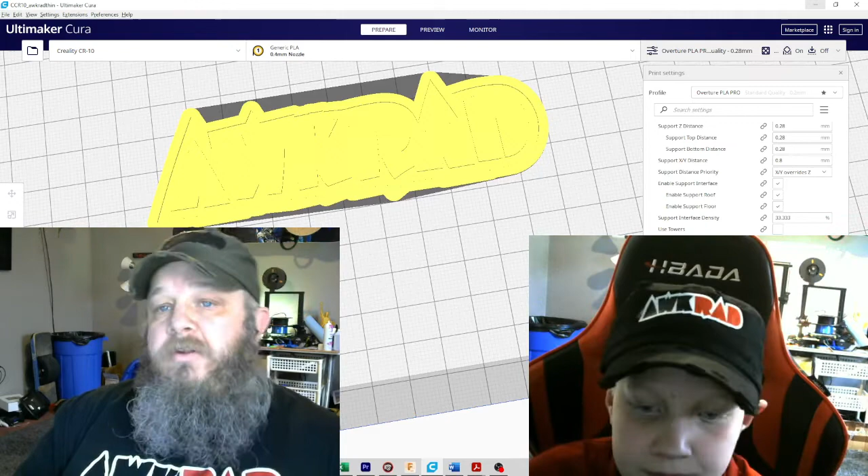Slicers? What are you talking about? A slicer. You want to know why they call it a slicer? Because they're taking your 3D object and putting it into a whole bunch of different layers, called slicing. And that's part of what this software does. The other part is you can determine things like how fast it prints, how hot the melting end gets, whether what you're going to print is solid or hollow, or partially solid or hollow. Did I miss anything? It does all those things.

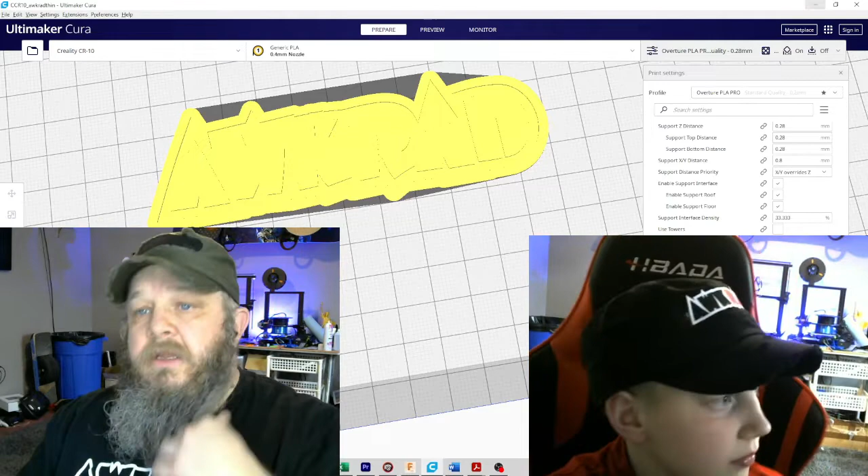Did you say if you make it larger or smaller? Oh, yeah, you can make it larger, smaller, the scale can be adjusted. Also, the quality, right? You can adjust the layer height. So each layer that gets printed can be really, really tiny, which would give you finer detail, or it can be a little thicker, which would print faster, but it wouldn't look as good. So that's kind of what this software does.

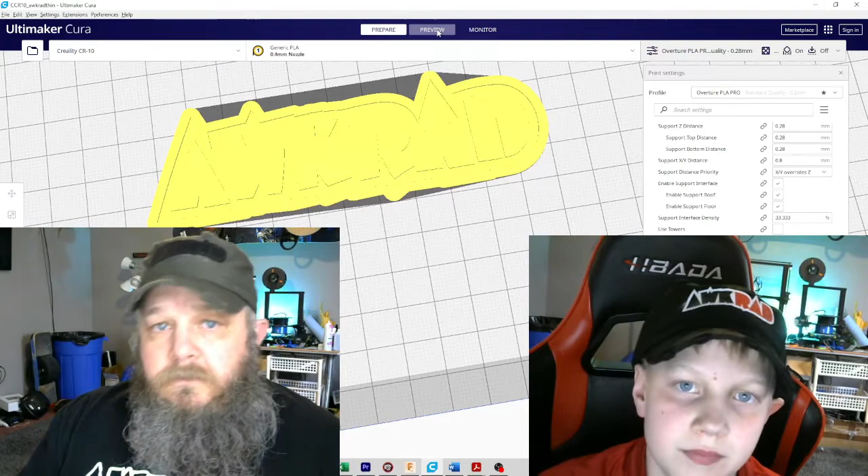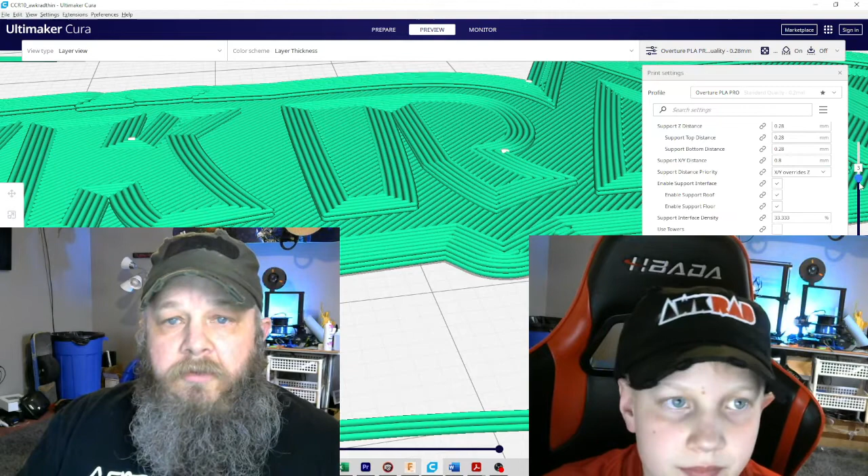I'll put this in a mode where you can actually see some of these layers. I don't want to overcomplicate things, but basically if you zoom right in here, you can see 1, 2, 3, 4, 5, 6, 7, 8, 10 layers, something like that. And you can set that to whatever you want. And then you can go down through and see what's going to happen. The first layer is going to look like this, your second layer like this, and your third layer like this. So it's really only a few layers to create this file, and that's going to instruct your printer on what to do.

Now, the slicers are also free.

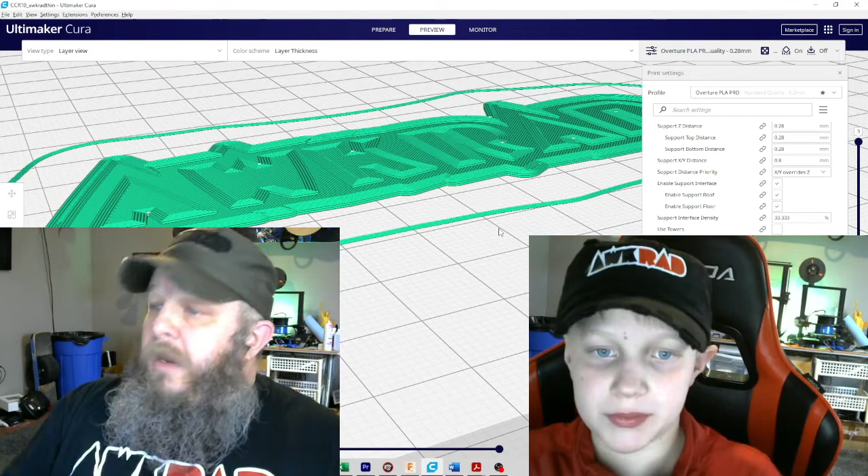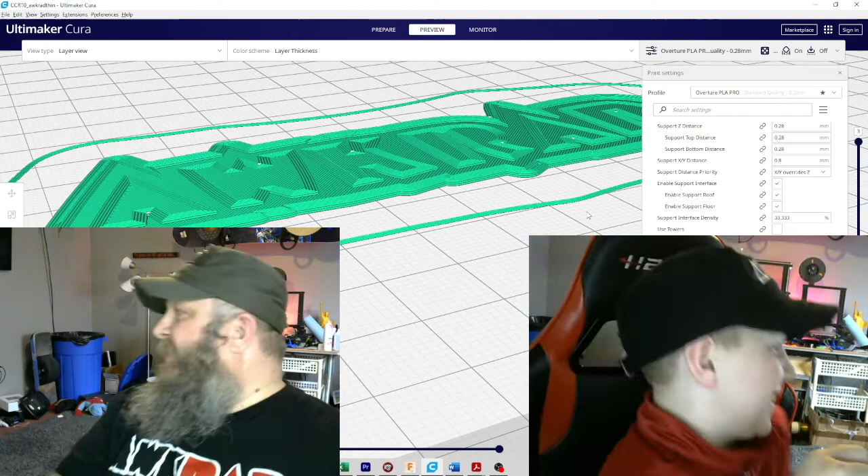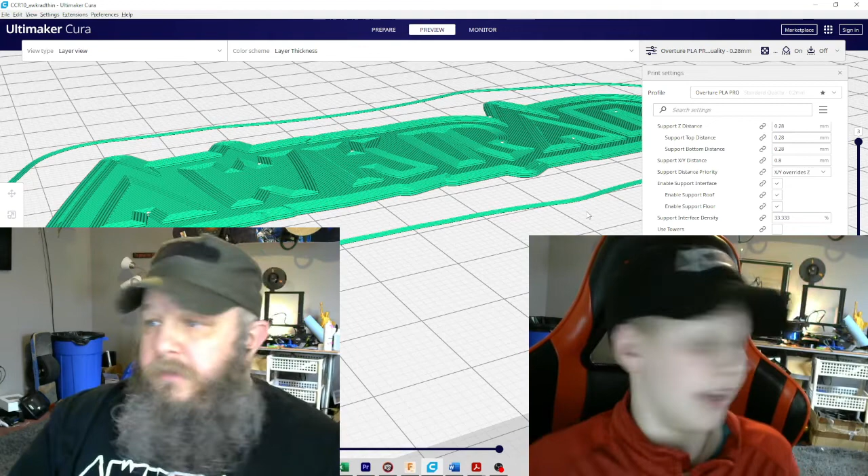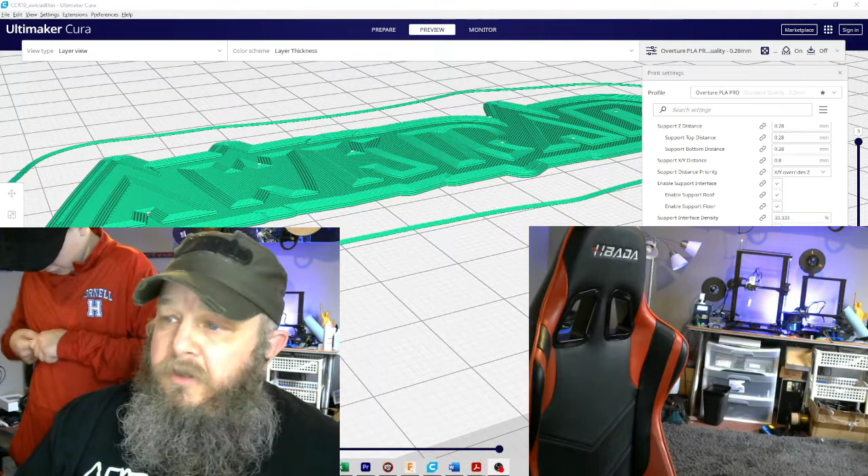Yeah. All right, so it's saved to disk, and that's what we did. And then you save it to a disk, or you save it to your C drive. And in the case of my printer, and this is where we get into the next video, guys. I'm not going to get there with this video. The next video is some of the options for printers and what kinds of things you might not be able to live without and what things you can.

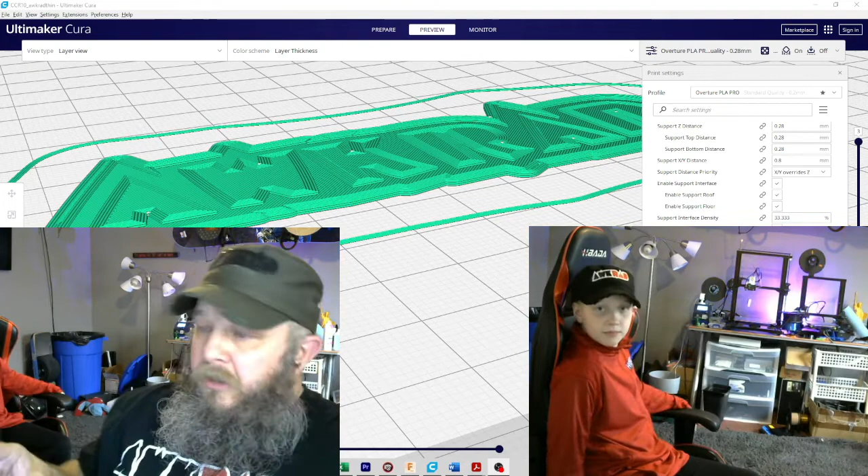In this case, the difference between his and mine as it relates to getting the file to the printer is mine has what's called OctoPi, which is a Raspberry Pi based computer that has a web interface, and so I can upload directly from my computer to the web interface. And I'm gonna show you that right now, just so you can see it. I'm kind of giving a longer view of what our thing looks like. And that's what OctoPrint looks like. It's basically just an IP address in a web browser on our network.

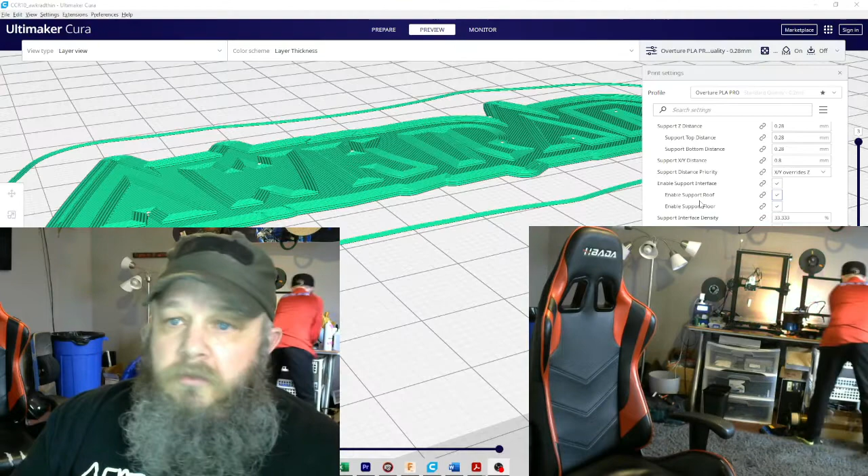I've uploaded this file right here to the machine. It controls everything, the temperature, can move it, whatever. I'm going to go ahead and hit print, and within a couple of minutes, this thing will start printing, and I'll bring the phone over and show you what it's doing. So, quick recap. Get your design file, get it into a slicer and slice it, send it to the printer somehow, and then the printer does what it's supposed to do.

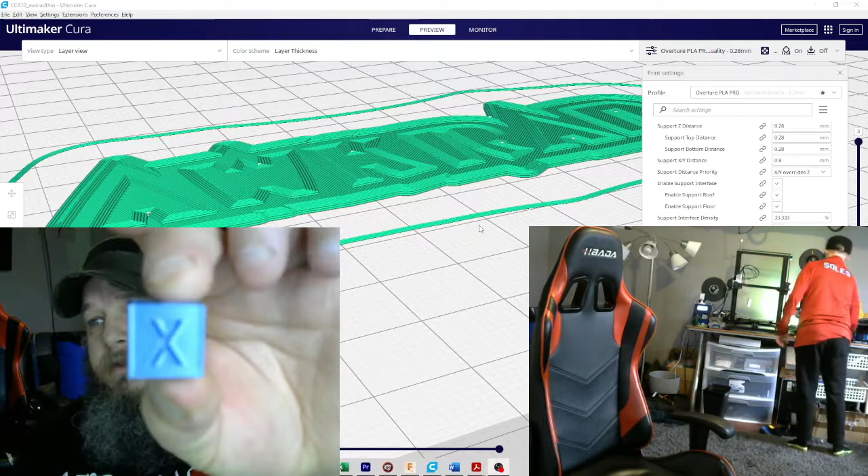There's your X, Y, and Z. Yeah, so X, Y, Z. That's smart, yeah. So that's your X, left and right, your Y, to and fro, and your Z. Oh, look at that, guys. Is actually kind of up and down. Mine a little bit, but whoa. You can kind of see that it's coming down. Which one? Mine or yours? Printer. Oh yeah, yep. Kind of tell it's going down. Let's just do it this way.

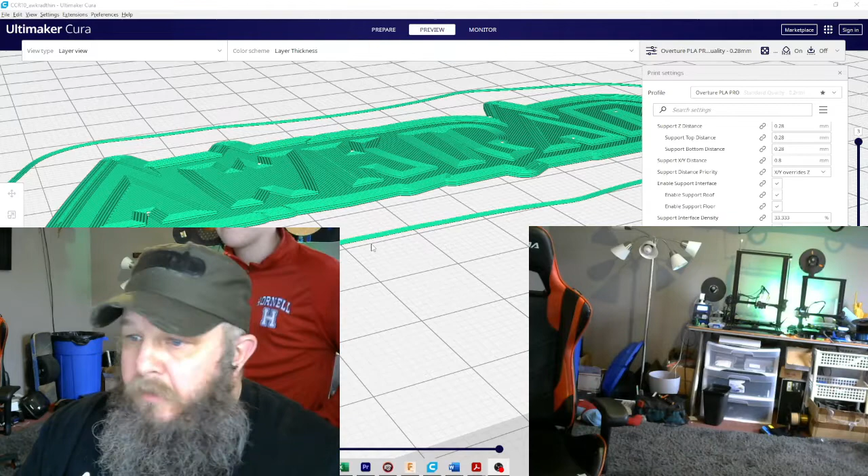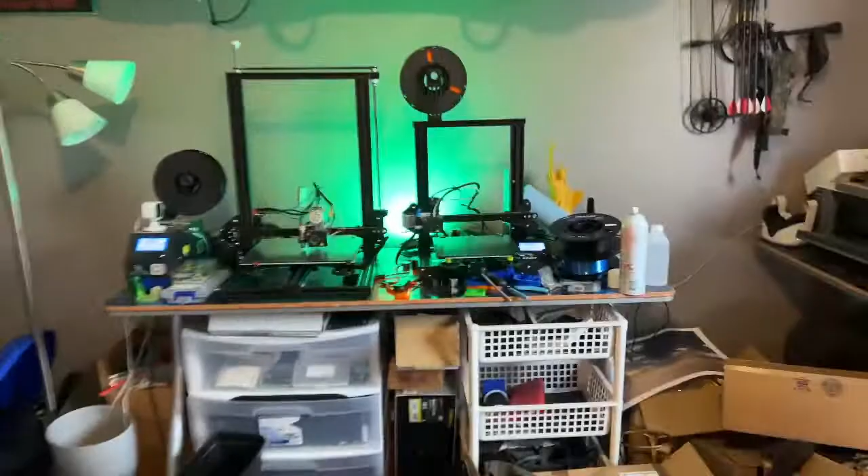Let me go to this screen, this guy. Bing. Yes. Whoa. Oh, look, we're mobile. We're mobile.

Okay. So we started that print. Let's start mine. And right now, what it's doing is, this has an automatic bed leveler on it. So it's sensing different points on the bed to determine if the bed is perfectly level or not. And if it's not, it's going to go ahead and adjust the print to accommodate for any out of level on the bed.

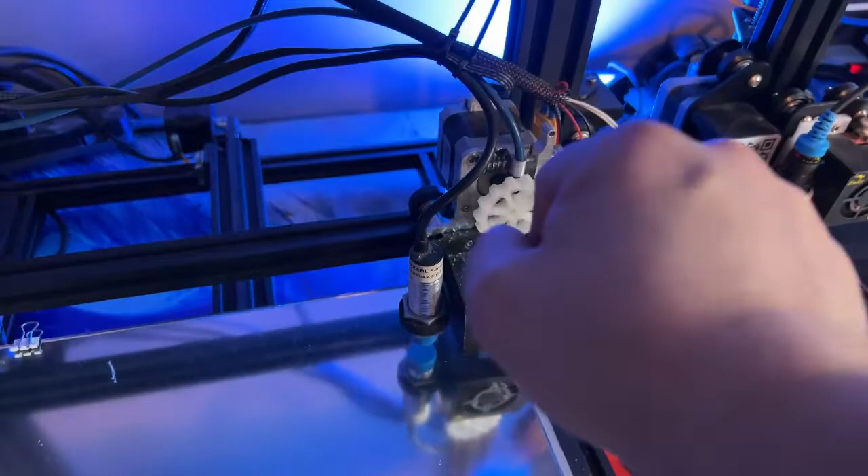Like I said, we're going in the X axis now. And then when this bed moves back and forth, that's your Y, and then up and down is your Z, and this is your extruder or your hot end, and that's called your E axis. Okay, so now it's going to go ahead and bring itself to the beginning. It's going to print a quick little sample line. See if I can get down here and show you that.

Can I hear your audio through camera? You should be able to hear it through my phone. Oh yeah, that's on your phone. Hopefully.

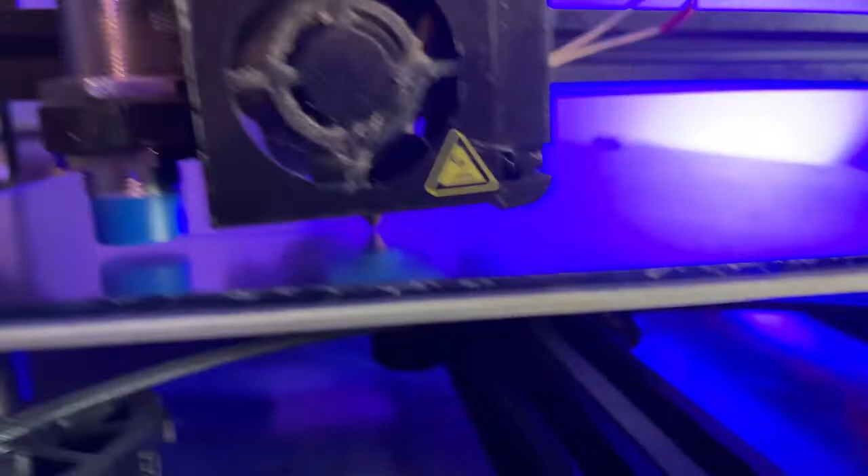And there we go. It did print a nice sample line. It's looking pretty decent. There we go. Now I've got it set to a skirt. So what it's doing at this point is it's going around and putting a line here around. It's not the actual print, but that line I can feel, and I can adjust, and I can tell whether it's actually sticking to the bed or not.

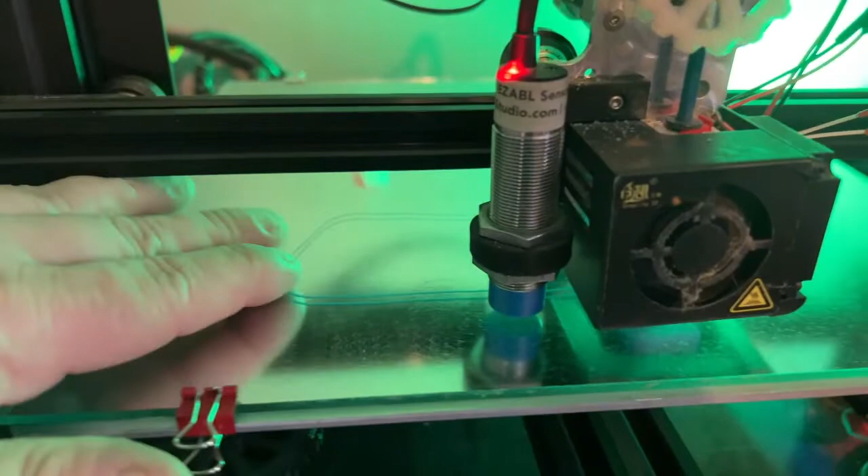And then there's some fine-tune settings you can do to make sure that if I've got to go up or down just a tiny bit to squish this into the glass to make sure it sticks. That's pretty much what's going to happen here. So it's going to do the first layer, the second layer, the third layer, and when it's all done, we're going to have a printed logo, just like what you saw on the screen. Pretty cool, huh? Yeah. Cool.

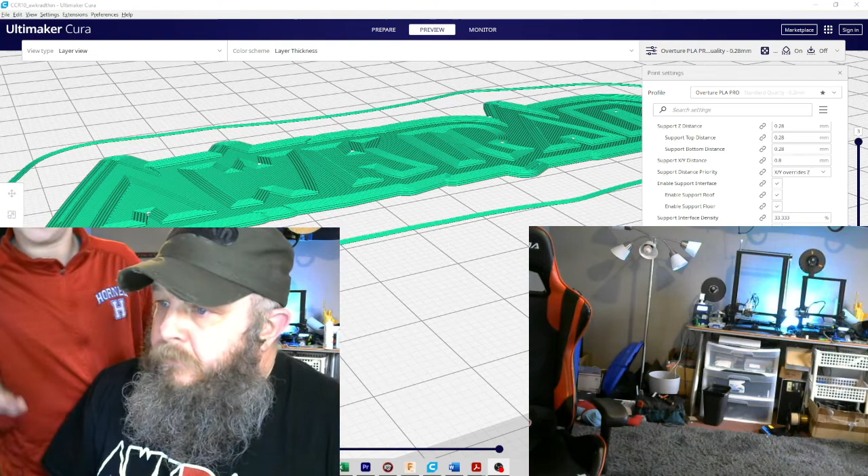Let's go back. Wait, I have a question. What's up? So I can hook it up to my computer. What if you don't have it connected to your PC so you can start it? What if you need to use this? Oh, we can show them real quick. Do you know how to do it? I can't connect it to the PC. Oh, well, we'll have to show them that in another video. But yeah, that's basically it.

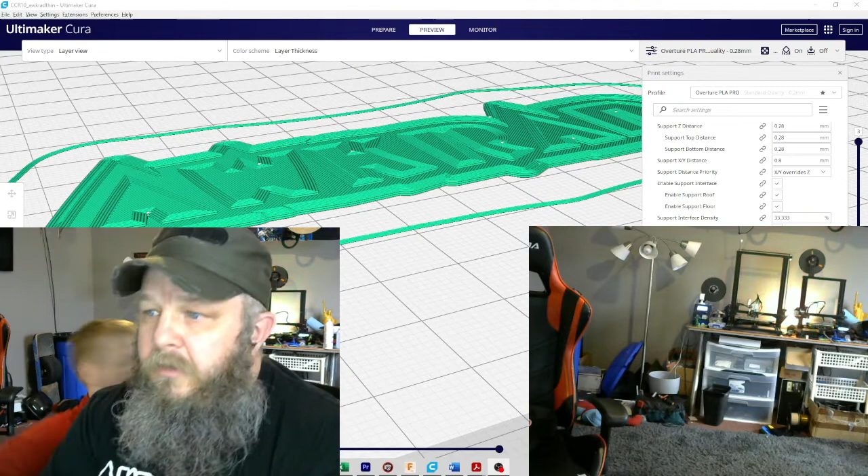Get down on my knees. You don't have the adapter, is what you're saying. Yeah. Well, you have a whole camera over here. No, but that's for the 3D printing. Well, why don't we just do this then? Hey. So anyway,